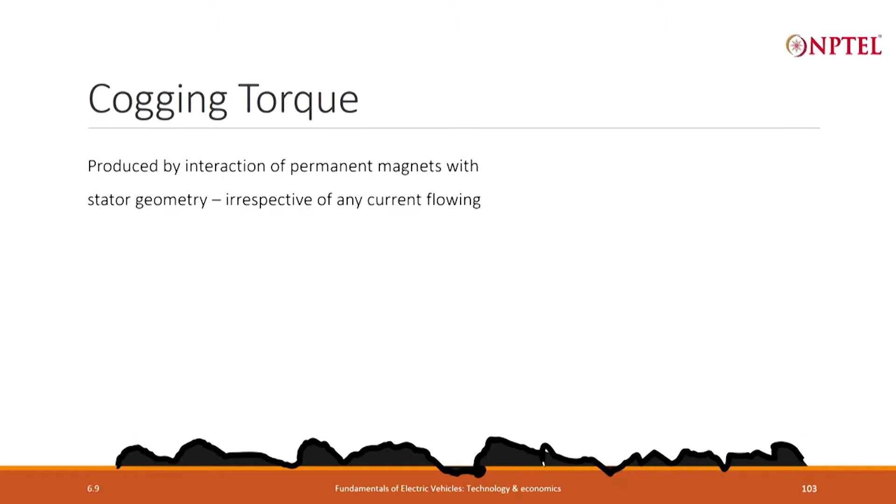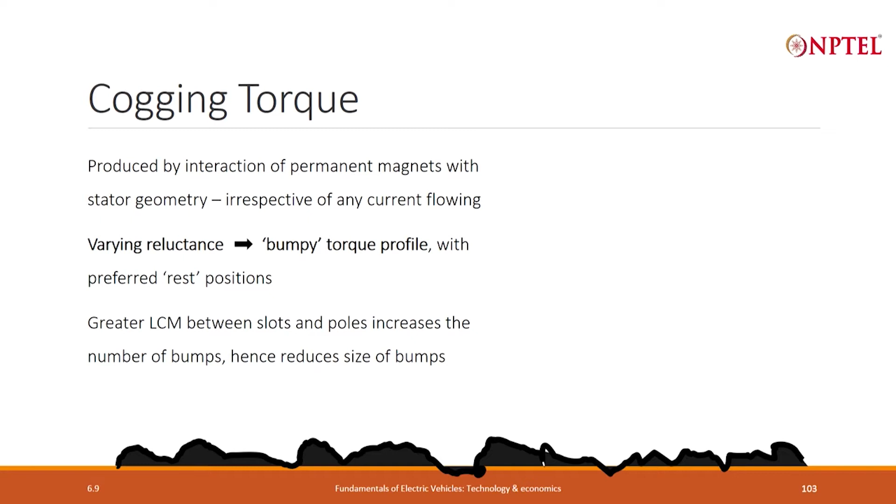and this is because of the varying reluctance profile around the rotor because of the intermittent teeth and slots that are there. In fast running we may not feel it so sensitively, but it is nevertheless there, and it gives a certain poor quality of ride in an electric vehicle. It gives rise to some vibrations, not a very smooth experience.

In general, when we are designing a motor, if we want to minimize the graininess, an easy way to do it will be to increase the number of bumps. When you have more number of bumps, the size of every bump reduces. You can't make anything perfectly smooth. So, this is the practical way in which we do it,

and the number of bumps that we get in a rotation is linked to the LCM, least common multiple, between the number of poles and number of slots. Poles means the number of magnets, and slots are the spaces between the teeth where the winding happens. So, in general we try to design the motor in such a way that the LCM is maximized.

What makes the cogging worse is that in practical manufacturing there is always some eccentricity between the stator and the rotor, and the air gap between the stator and the rotor is typically half an mm to 1 mm; even 1 mm is too large. So, within that, if I even have a 0.1 mm eccentricity, I am actually creating a 20% difference in the air gap around. That asymmetry will further aggravate the cogging torque.

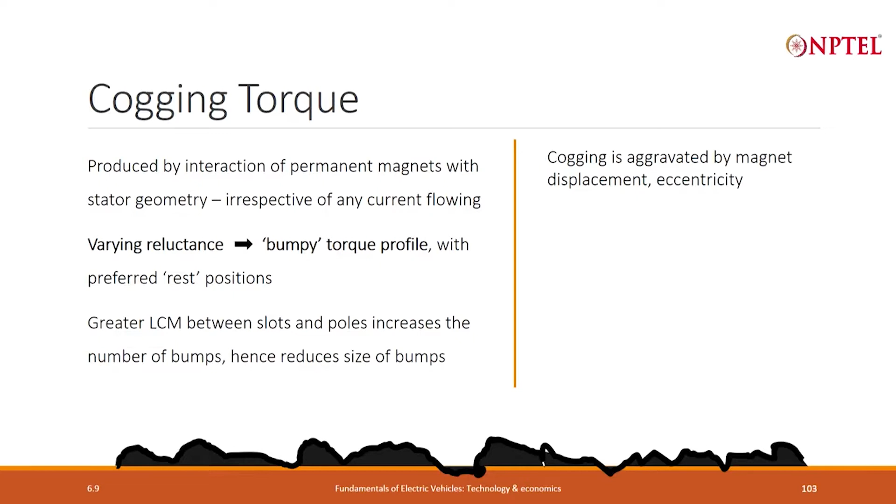Likewise, the magnets may not be exactly at the position I intended; they may be a little bit displaced angularly because of small manufacturing clearances, and these will further aggravate the cogging behavior. So, as you can see in the animation below, you feel as if you are going on a bumpy road, although you are not travelling on a bumpy road. That is what cogging does.

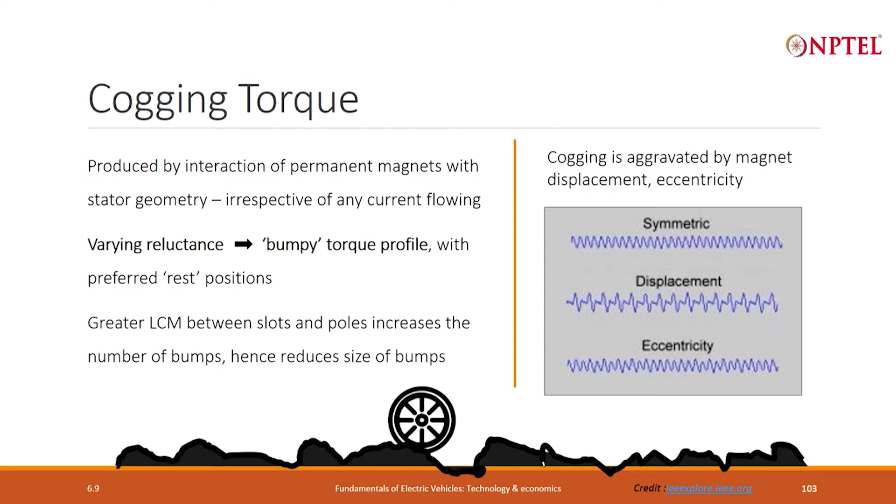Cogging is a phenomenon which is entirely because of the magnetic reluctance. You can feel it even if you just turn the motor shaft by hand, with no current flowing. But in addition, when the current is flowing through the windings, the windings cause a magnetomotive force, which means they magnetize the teeth, and we have seen that the profile of that magnetic field results in what is called the reluctance torque, and that also is not very symmetric.

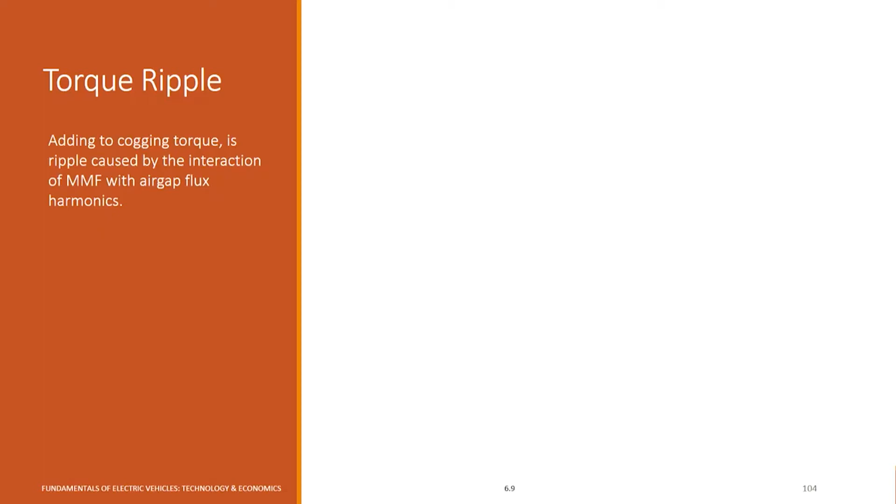Therefore, when the motor is running under the influence of the current at different angular positions, the torque that it delivers is sometimes high, sometimes low. So, what we normally refer to when we talk about the torque is the average torque, and that average torque is shown here. In this case, it is 59.2 Newton meter, which is indicated by this dotted line.

But actually the instantaneous torque as the motor rotates is sometimes higher, as high as 67.7, that is the maximum, and sometimes it falls down to as low as 50.4 Newton meter. Normally we express the total torque ripple, as it is called, as a percentage of the average. So, in this particular case the torque ripple is 29.2%, which means compared with the average torque, the ripple is plus or minus 15% approximately.

So, this also leads to a very jerky and vibrating kind of ride experience. It is not comfortable, it could generate noise, and it will also reduce the life of all the joints which are there in the vehicle.

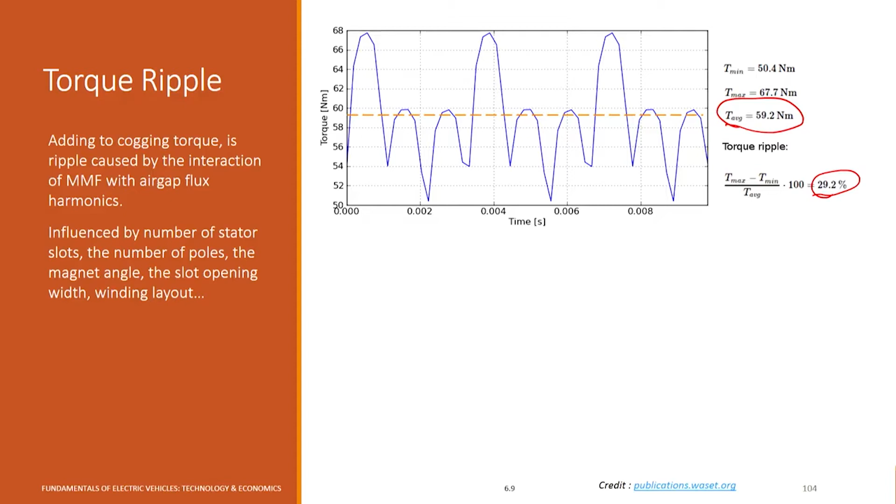And the behavior of this torque ripple on account of the current flowing is influenced by a large number of detailed factors which are there within the geometry of the motor design. Since we cannot completely avoid it, there is actually a cool trick to reduce it.

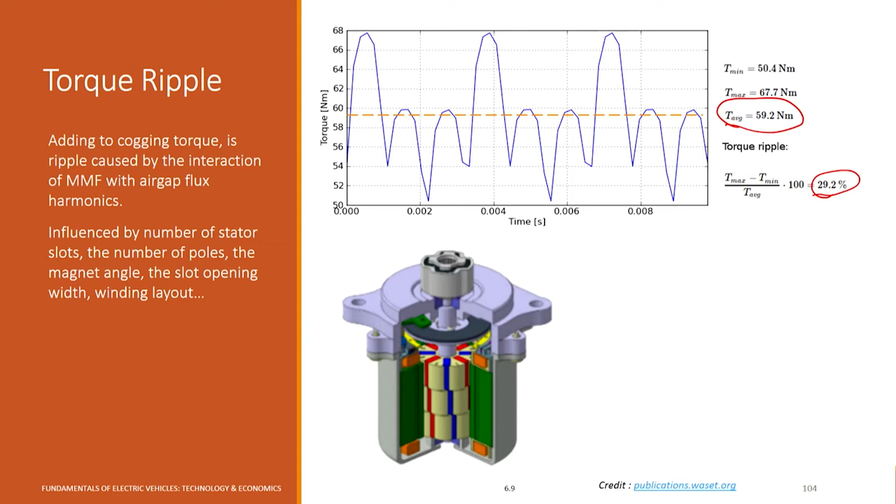As you can see here, the rotor is not like a straight cylinder in the sense that there is one north pole and then there is a south pole going around the cylinder. That is not the way it looks here. What happens is that here there is a pole which is then offset and then again offset. The entire rotor has been sliced, and each successive slice is offset from the next one.

As a result, let us say, as in this picture I have made 3 slices, then each slice is like a mini motor and 3 motors are connected in series, 3 rotors are connected in series, and the torque ripple due to each becomes 1/3. Of course, the average also will become 1/3, the peak and trough will also become 1/3. The percentage of torque ripple on account of each slice of motor will not change, because both the numerator and the denominator are getting reduced to 1/3 of their original values.

But the next slice will not hit the peak at the same time as the first slice, it will do it after a time lag. Likewise, the third one will hit a peak after a further time lag. So, at any given point of time, the largest peak I get will not be the sum of the peaks occurring at different times, and so the overall ripple will get suppressed, whereas the total average torque will be the sum of the average torque delivered by each of these, and that will remain unchanged.

So, this idea is called skewing, and by skewing I can reduce the cogging torque as well as the torque ripple due to the windings. And the idea is very simple. You ensure that all the magnets do not align with the reluctance at the same time, they do it with a time offset. So, this is a very neat and easy trick. It does not cost too much more to impart a skew, but it will make the operation a lot smoother.

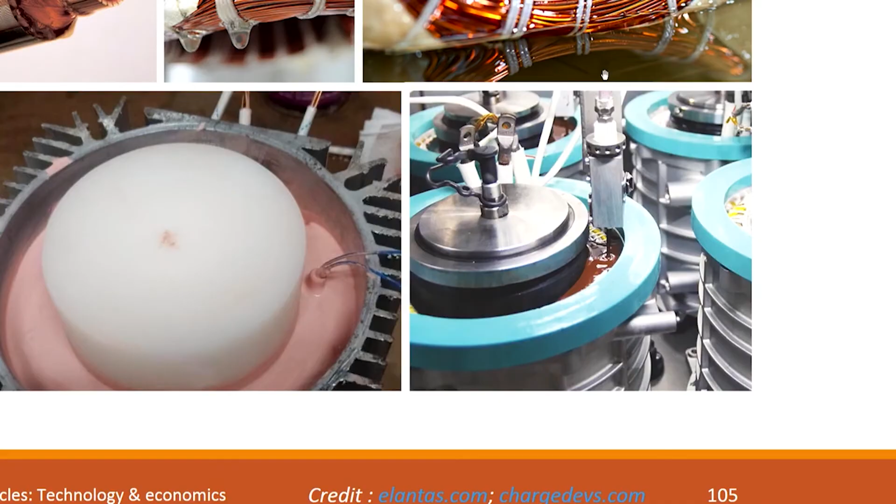The materials that we look for are those which are electrically insulating, thermally very stable up to fairly high temperatures, but are good conductors of heat. So, the gap between the wires in a winding is often filled with what is called varnish, which is impregnated. The picture that you see, let me zoom it and show you. This is a kind of equipment where the stator with the windings is soaked, and through capillary action the varnish rises up, and then when it is baked it sets, and you get something like this. So, all the air has been replaced by the varnish, and this helps in better heat evacuation.

Another thing that one can do is what is called resin potting, which covers all the windings. What do you see here? It encases all the windings, including the overhang of the windings outside the stator, in a thermally conducting but electrically insulating enclosure. And another advantage of this is that it also substantially prevents any moisture that may seep in. If the IP67 protection is not very effective, if it has worn out after some time and under some heavy submergence condition, if some water trickles in, this will ensure that still that water does not get in contact with the wires.

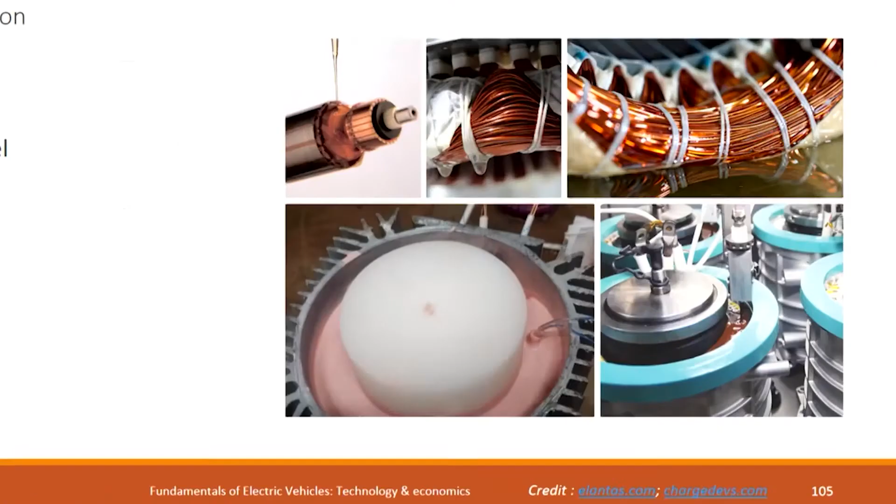And the other thing that we do is at the interface between the stator, which is made of steel, and the housing, which is made of aluminum. It is a curved surface of contact. The stator is made of laminations, and the laminations are stacked. So, if I were to look at the outer surface, it will not be very smooth. If this is the stator, which is made of a number of laminations, then the surface will be like this if I look at it through a lens.

And then when there is an aluminum housing inside which I insert it, there will be quite a bit of varying air gap. There will be a few points where the steel and the aluminum are in contact, and other places where they are not in contact. This is another place where I need to avoid the air, because the air is an insulator. So, we apply what is called a thermal compound, which is typically an epoxy, and then if I shrink fit the housing onto the stator after applying the epoxy, all the air gaps are replaced by epoxy, and this significantly improves the heat evacuation.

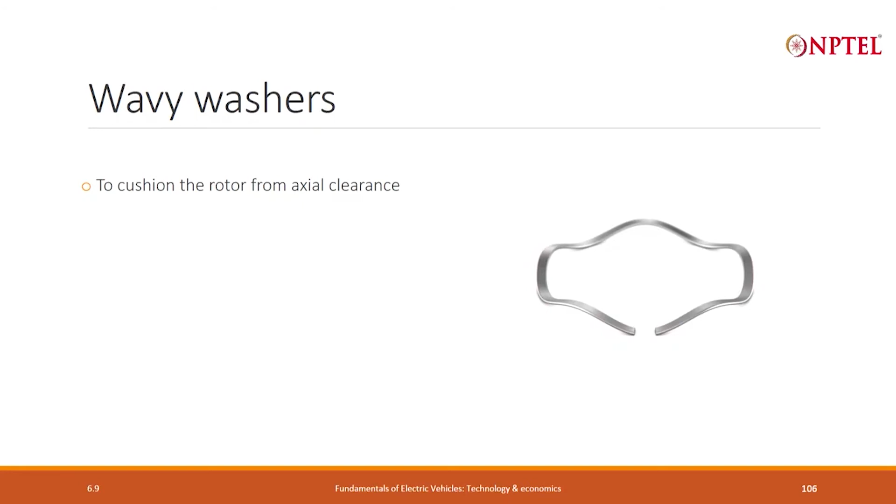So, it is a small but subtle point, and so to cushion the axial movement of the rotor, we use something called a wavy washer, and the other advantage of the wavy washer is that I can have a light fit of the bearing on the housing.

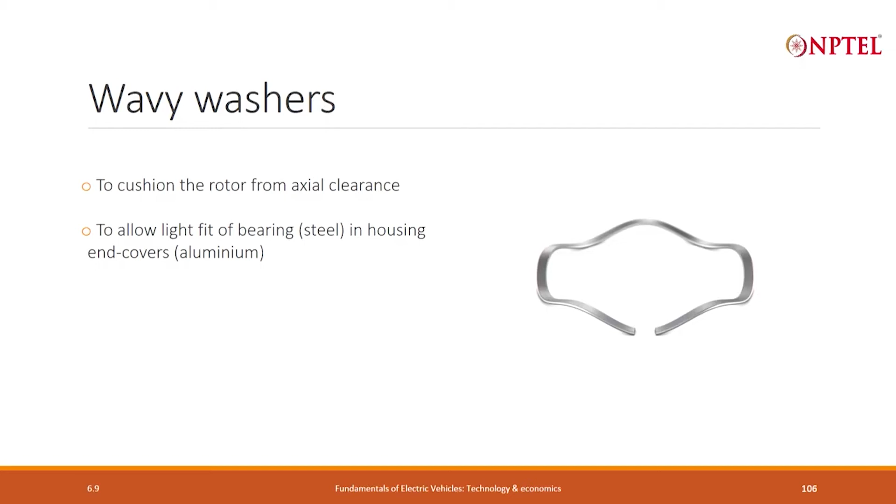See, what happens is when I am assembling the entire motor, I will press fit, means give a very tight fit between the bearing and the steel shaft of the rotor. Then when I have to cover up everything by putting the end covers, they have what are called bearing seats into which the outer diameter of the bearing will sit. But if that fit is tight, then I have to beat the whole thing or press it with some high pressure in a hydraulic press to assemble, and that will damage the life of the bearing.

In fact, the life of the entire motor depends on only one thing when we talk about life, provided we are not operating it out of thermal limits. We have already discussed that if it becomes more hot than it is designed to, then the magnets may get weakened and that will be the end of life. But if we do not operate outside of the specified design boundary of a motor, there is only one thing that defines the life. In principle, the motor can run forever, infinite life.

The only thing that will lose life and therefore cause the motor to lose its life is the bearing, and the life of a bearing depends on how harshly it is treated during assembly. If I am going to beat it, then there itself I have ensured that I have halved the life of the motor. So, I do not want to give a very tight fit which causes beating of the bearing into the bearing seat.

I want to give a light fit, but when I give a light fit, when the temperature rises, the bearing will expand because it is made of steel. The seat of the bearing will also expand, it is made of aluminum, but the seat will expand more than the bearing. So, suddenly the bearing will become free of the seat, it will rotate together with the shaft and abrade, and that will be far more damaging to the life of the motor.

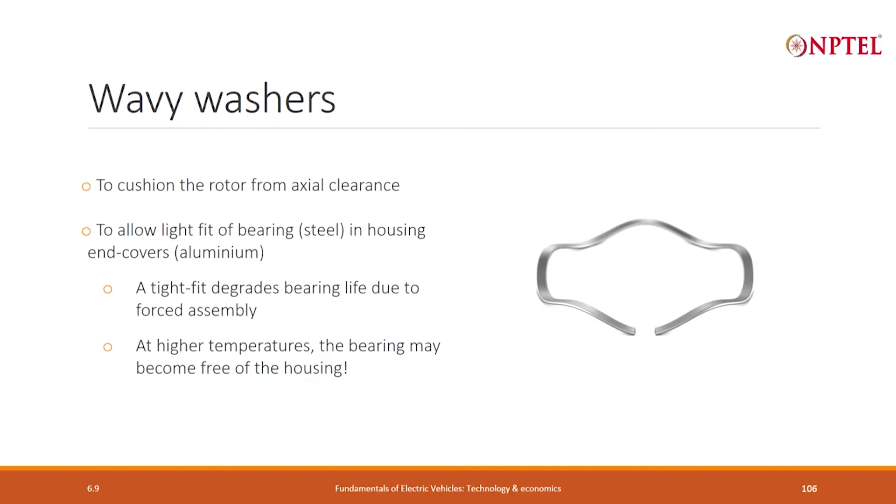So, what I want is to hold the outer race of the bearing with some pressure, so that even if there is a clearance between the bearing seat and the bearing, it should not be a free running outer race. All of these are the roles that are played by this very simple humble component called a wavy washer. And so, we have discussed all of this. I will show you a very small animation on how the wavy washer works.

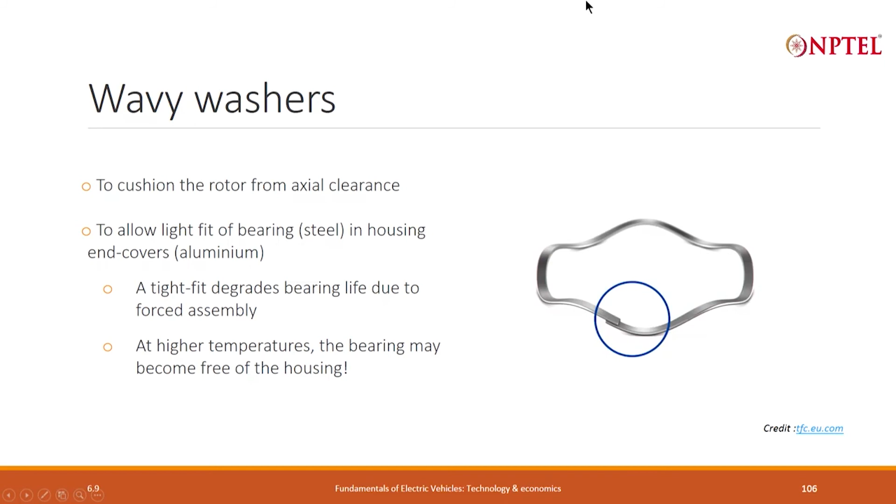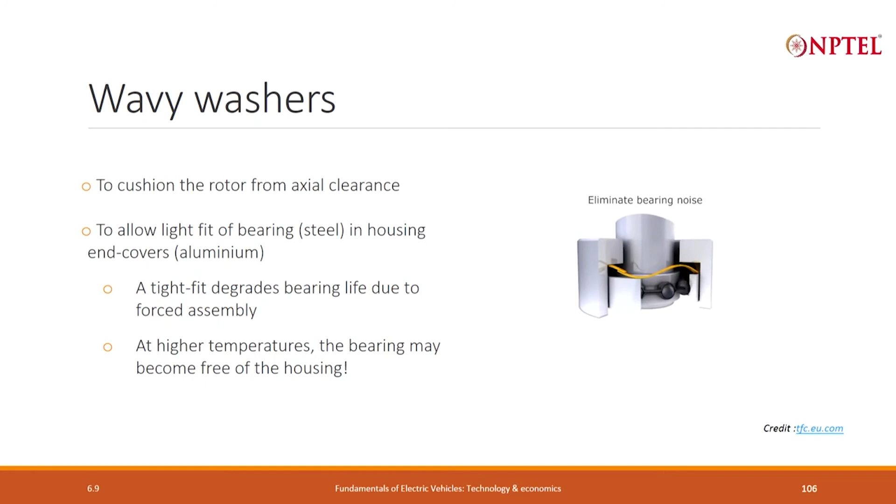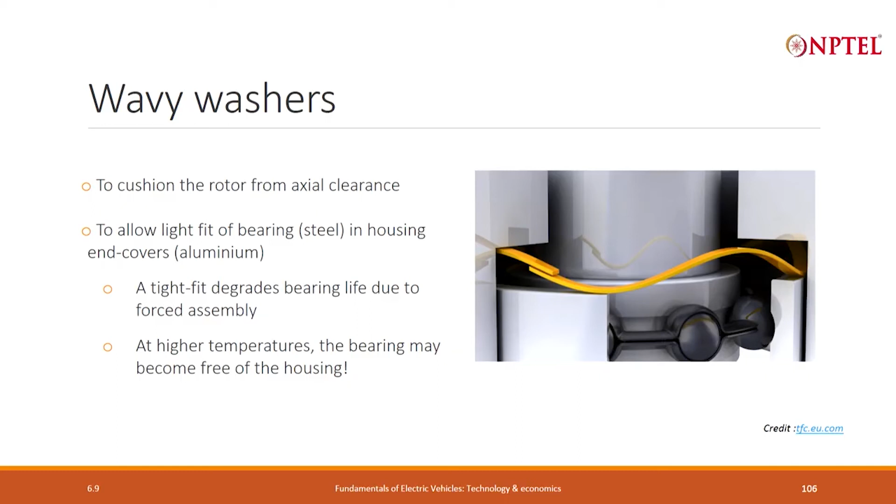So, it is located in the axial clearance between the rotor and the stator at the place where the bearing is, on the outer race of the bearing. So, if there is a tendency for axial movement, it provides a cushioning action and a restoring force.

The next topic is something called a shaft collar. I do not know how many of you have heard of it. When I want to restrain something which is mounted on a shaft from moving axially freely, for example, the rotor stack made of laminations is assembled onto the shaft, and there again I do not want to keep a very tight fit, because the thin laminations, if I try to beat it or press it, will get bent and damaged. I will keep a free sliding fit, and there is a key and a keyway to ensure that the shaft and the stack will rotate together.

But if I do not do anything else, there is a likelihood that the rotor stack made of laminations will slide axially along the shaft and move out of alignment with the stator. So, that will lead to a degradation in the performance of the motor. So, to constrain anything axially, conventionally what we use is something called a circlip. Mechanical engineers in this classroom will be familiar with what the circlip is, but the circlip comes with a number of disadvantages, and the shaft collar is what we prefer to use.

The problem with a circlip is that the amount of axial restraining force it can provide is limited, and it depends a lot on the fit between the circlip and the groove in which it is supposed to sit, and therefore that groove has to be very precisely machined for a correct fit with the circlip. If that fit becomes loose, the circlip will just jump out, and if that fit is too tight, I can't even assemble the circlip, it is a messy thing. And the other problem is that the groove has to be machined at one location.

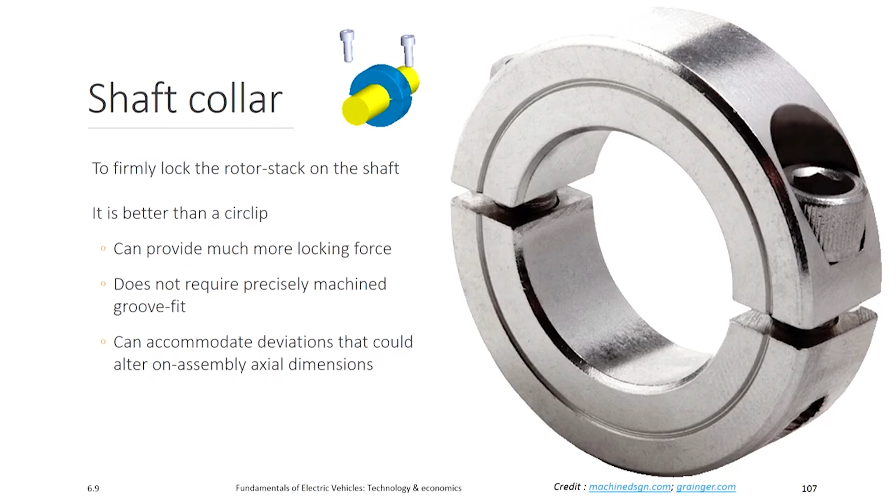The other point I want to talk about is something often overlooked, what is called contact resistance. We design the motor very carefully so that we minimize the winding resistance, keep it of the order of a few milliohms.

But what we do not realize is that outside of the winding there is a lot of copper and other conducting materials through which the electricity flows, and if we do not pay as much attention to the impact they have, we may inadvertently end up increasing the overall resistance in the system, and that will actually reduce the efficiency as well as cause unwanted thermal problems at different places.

So, one of the common areas which is overlooked is what is called the lug, which is a metal which is used to hold all the wires together, and if you look here, there is a lot of air gap between the wires, and between the wires and the lug. The air gaps indicate that the area of conduction is actually very much reduced at that place,

and when the area reduces, we already know from what we learnt about resistance, rho L by A, if area is very low, then at that place the resistance is very high. And likewise we in turn put bolts through the holes in the lug to fasten them onto other conducting surfaces in order to then lead them away.

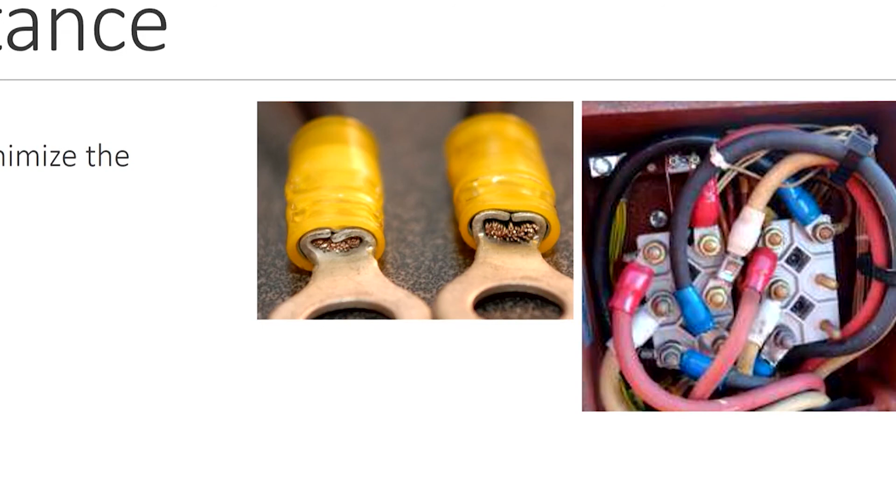Now, at all these places where we fasten the area of contact, supposing this plane is not exactly plane, it is slightly concave, then it will only make a line contact. If the nut which I am using to tighten is not perfectly flat, well machined, then it will dig in at some place and have a clearance in some other place. All of these will lead to a significant increase in the resistance.

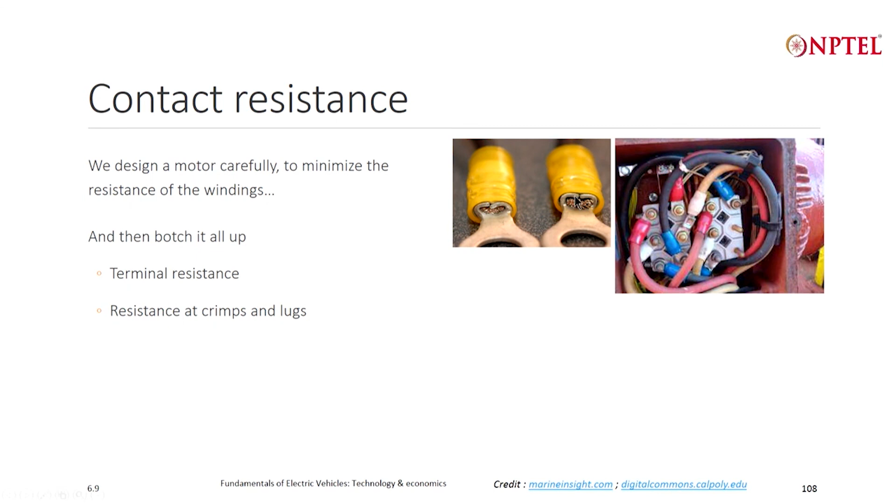So, the bolt nut points are called terminals. Terminal resistance can be very high, and then at the crimps and lugs again the temperature can be very high, and these could also become hot spots apart from reducing the efficiency, because a large resistance acting on a very small region where there is very little thermal capacity will lead to a sharp rise in temperature.

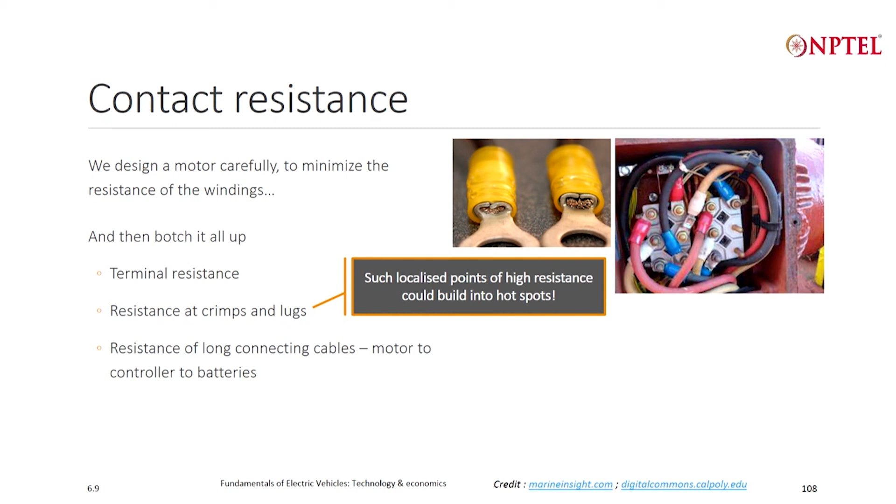And finally, from the motor you have cables. The motor is normally located at some place under very severe space constraints of the vehicle, and then the controller will be located somewhere else where there is space, and the battery is positioned somewhere else, and you have copper going from the motor to the controller, from the controller to the battery, and that length can become very significant and will add to the overall resistance.

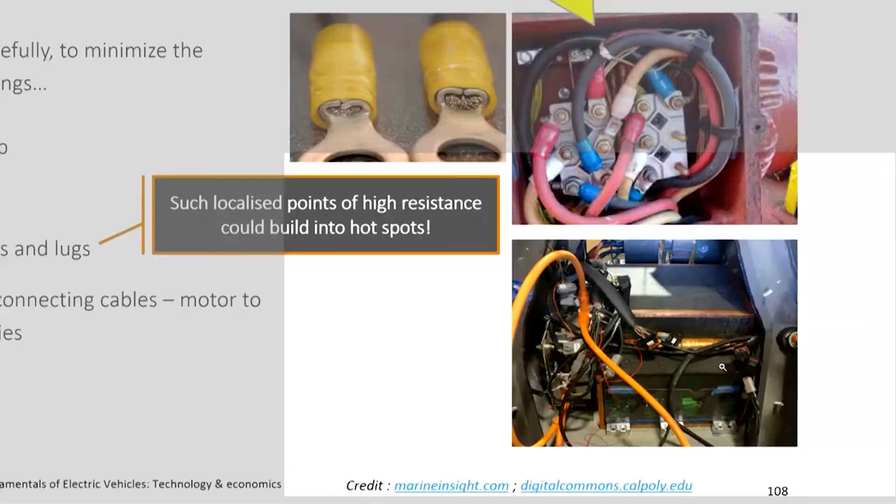This is the kind of way things are often connected. So, you have wires crisscrossing all over the place, and although copper is a good conductor, when you have a significant length of it, it will all add up, and here we are talking about really milliohms of resistance. So, I may design a motor which gives only 12 milliohms, but if I take into account all these other sources of resistance, the overall system resistance may be nearly double. So, we must pay attention to minimizing the resistance of the whole system, not just the motor windings.